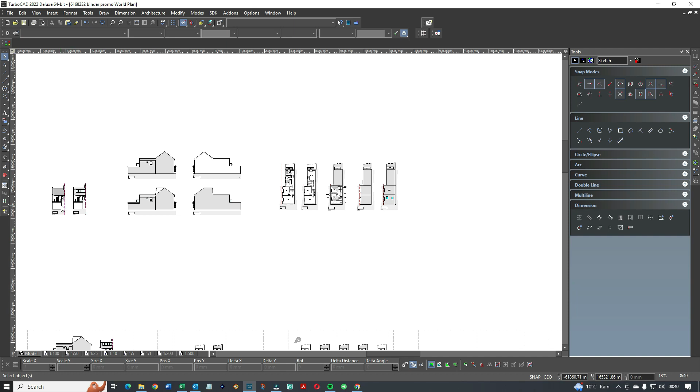I'm Tom Norris, and today we're going to have a look at one of our projects which has crossed my desk over the past few weeks. This is a two bedroom flat, actually a first floor flat in southeast London, and the client is looking to add a loft conversion, which makes absolute sense because they'll turn what is a two-bedroom flat into a four-bedroom flat. So it's a fantastic way of adding value, because with the price of property in the locality, you'll certainly add more value than you'd pay for the cost of the conversion. So I put some of the job files together here for us to look at.

I think what we'll do is have a little look at the layout first. So this is the existing layout. You come up the stairs here - this is the hall and landing. It's a very traditional Victorian end of terrace. So when these houses were converted into two flats, you end up with a lounge, a bedroom, and the back addition is open to debate. Sometimes it's another bedroom, sometimes a bathroom, tiny kitchen, or it could be a kitchen diner. Generally the back addition varies quite a bit, but this was most certainly a lounge and a bedroom when they were converted, say back in the late 80s, early 90s.

So we're looking at this particular flat, and this is the layout as it is. It's being used as a two-bed flat with a little tiny kitchen. It's got a roof terrace, which is useful, but the kitchen is dreadful - stand-up only, absolute bare essentials. The bathroom is quite tiny, and this bedroom is quite tiny. As you can see, there's no wardrobes - you might get a little table there, but it really is pretty poor.

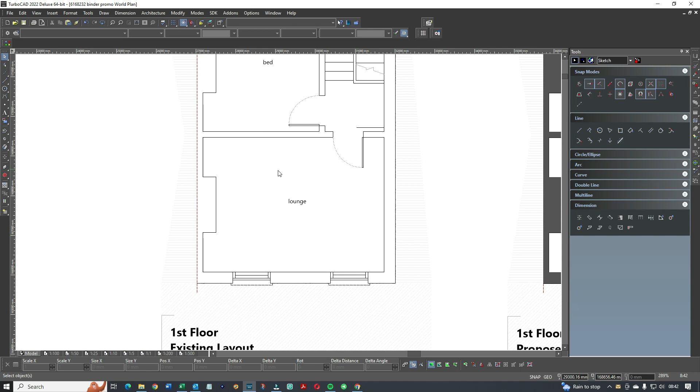Now, I noticed that on some of these conversions, what some developers will do is take this lounge, move the door a bit, run a kitchen down here with kitchen units, and turn it into a lounge diner. Then they'll have a bedroom, another bedroom, and a bathroom at the back. So they'll effectively turn it into a two-bedroom flat again, but with a much better layout. Depends what you want, but generally some of them are doing it.

So this is what we proposed, having consulted with the client, who wasn't looking to get rid of her lounge - she wanted to keep it as it was. So the front room, the first floor front room, is the lounge, then we have the bedroom. These two rooms basically stay the same, but on the back layout we've rejigged it. We got rid of this little small room - you can call it a box room or study - and put the bathroom back where it would have been more traditional, right on the corner. Bare essentials: bath, shower above, little window above the loo, and a standard sink. It actually works fine - it's in millions of homes. That's the style, that's the layout.

So now what we've done - over here in the old one, you can see you've got this big long corridor. Now you've got a really short corridor because the door here enters into the kitchen diner onto the terrace. So this is way better. You could end up putting a breakfast bar here, or even a little small island if you want, or a little dining table - depends what you want to do. This terrace is fine, but I would want to open it up a bit more.

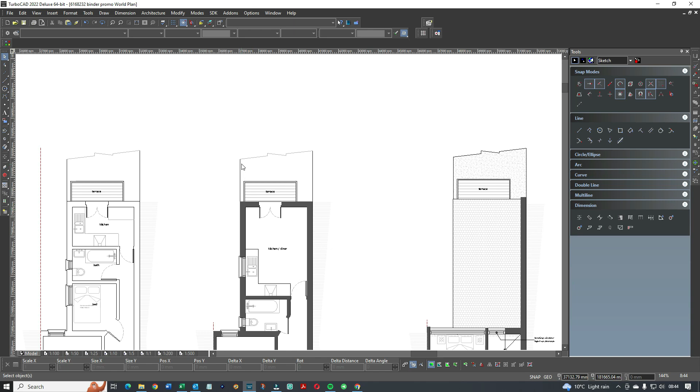The client didn't want to spend the money, but I would have certainly opened it up a bit more to get in more light and make it all more usable. In fact, you could even consider pushing this out a little, extending it out on top of the ground floor. But again, it's all to do with cost.

The main project here was to get a loft conversion done to the flat. So the usual scheme on these houses is that where the stairs come up, the stairs to the loft actually go around again, following the same line as the original staircase. So this is what we end up with in the loft - go up that stairs and you end up coming up here.

In the corner, we opted for a mansard conversion rather than a dormer, because this is an end of terrace property, so we can build up this wall no problem, and that will allow us to get the stairs in much better.

And you've got this landing area, you've got a window, loads of light pouring into the staircase, open stairwell, and loads of storage again on this landing.

And then you have one bedroom, bedroom 2. This one will be serviced with a Velux window, bathroom serviced with a Velux window, and this particular one has full width windows, and it could even be floor to ceiling if you wanted to get loads of light in. It's up to you, and as you can see there's quite a bit of space used for storage, as in wardrobes. These are standard wardrobe sizes, same here.

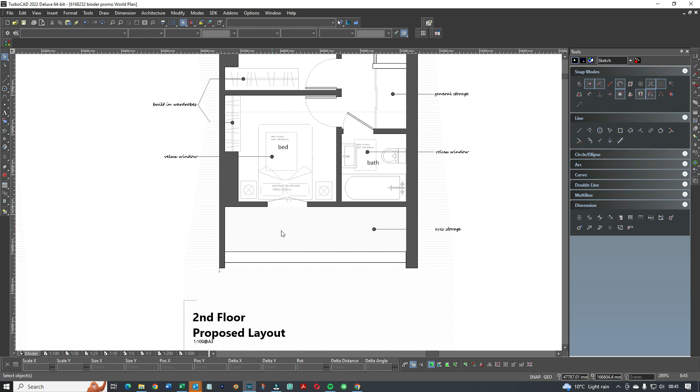We've kept the chimneys in to reduce costs, and of course the front loft area is the eaves. We've given a bit of access, and that's to be insulated and boarded over, etc.

So in other words, it's gorgeous, adding a lovely 2 extra bedrooms and a bathroom to the flat is really going to up the value.

If you consider that an extra bedroom is likely to add 75 or 80,000 pounds to the value of the property, 2 extra bedrooms will add 160. So 2 bedrooms will add fantastic value, way more than what the cost of the loft conversion would be.

We anticipate that the loft conversion on this flat would be about 45,000 pounds. Added value would be in the region of 150. So there you go - if you want to make 100k, then this is what you need to be looking at.

Buying the first floor flat, and then getting a license to alter from the freeholder to be able to use the space. And just so you're aware, on all of these houses that have been converted to flats, the landlord owns the space below the ground floor and above the top floor.

So you can't just do a loft conversion - that's his space, or hers space. So you'd have to get a license to alter and permission to be able to do a loft conversion. Can't just do it willy-nilly.

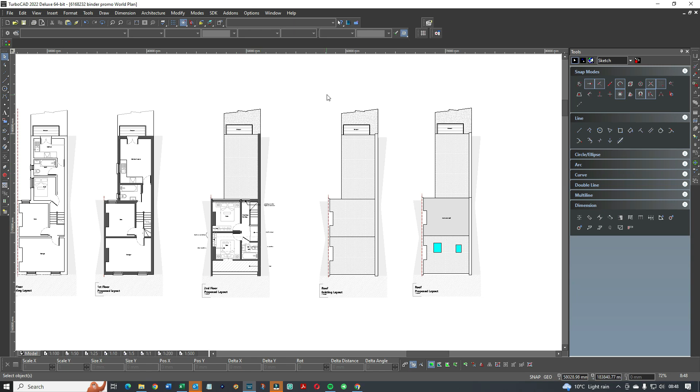The roof plan looks very similar, with the exception that we've got a flat mansard roof here, and as I say, the mansard walls, the boundary wall here at the end elevation side wall is built up, and likewise here.

So you would need a party wall agreement that will allow you to build on top of the party wall to get your mansard. If that fails, then you'll have to do one side mansard, and this side would be dormer, if the neighbours won't agree to give you permission to build on top of the boundary wall.

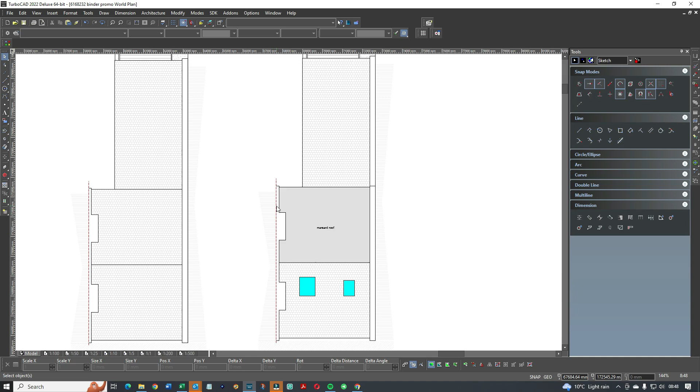But front elevation, a couple of Velux windows, which you'll need for this front bedroom and the bathroom. That's about it. You can see on the side elevations, the change is very little.

This is the existing side elevation. All that's going to happen is this little bit will get added on, and that's all you're going to see.

And likewise on the west side, the other side elevation, you're going to see this bit of brickwork added on. So it's very discreet, to be honest.

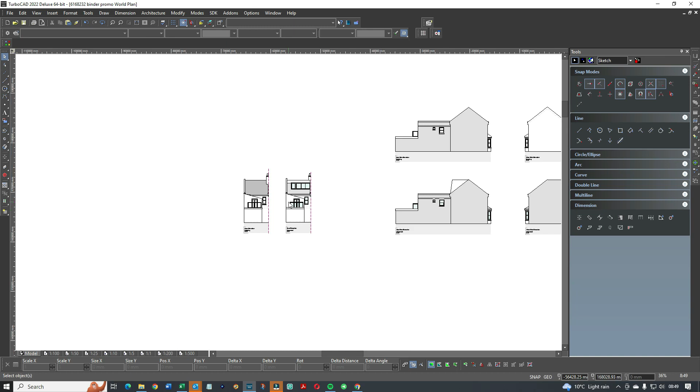Looking at it from the rear elevation is where it has the biggest impact on the elevations. This is the existing view. This is already the back addition here, and they built the ground floor out on here.

They built an extension. So my client, a few years back, built a small terrace. It's just an aluminium and glass affair, to give them an extra 2 or 3 meters from the little kitchen.

Like I say, I would probably have done substantially more, as in opening up and increasing the size maybe of the extension here. But the neighbours, well, let's just say, I don't think the budget was there for that.

So this is what it looks like now. As you can see, we've got the mansard on this side. Hopefully we're getting the mansard here, building up the walls, and then again, this is the window for the stairwell.

Personally, I like to drop this down the whole way, even if they're not going to be having, say, the more traditional French doors and Juliet balcony. I still like to drop this down completely and get tons of light, and that way if you didn't want to use it as a bedroom, maybe you could use it as an office, a home study, or a teenager's bedroom. There's lots of other options as against just having the windows across.

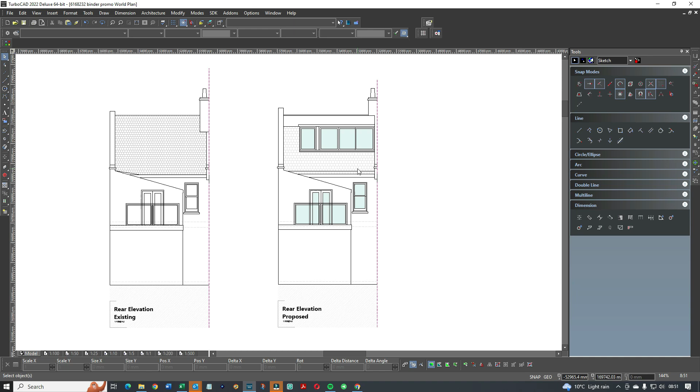But again, with an older client, that's what they've gone for, the windows rather than the full height. That's about it. So it was an interesting little project.

Just think about it. In summary, it's a one-bedroom flat. It's a Victorian property that was converted about 35 years ago, and the client was aware that if she got a loft conversion on it, she would be

able to add quite a bit of value and possibly make some money, in the sense that she'll probably have this work done. We've actually done the planning application for it, and I see no reason why it won't go through. Once she gets planning and has the work done, the chances are she'll sell when the market is right.

And she's effectively made 100k, as against selling it as it was. She's likely to get 100k out of it. So yeah, it's one shrewd lady, and I'm really pleased. Lovely little project. All right, that's about it.

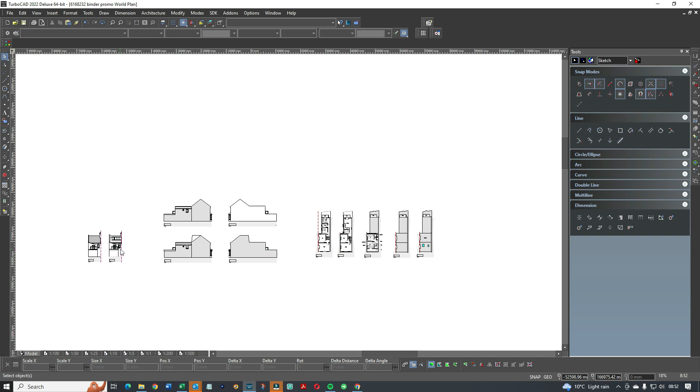Most of the projects we do, the intention is to create little videos from them, because we're not just teaching you how to draw plans, we're teaching you about, I suppose, the business of buying and selling property, and what kind of extensions add value and so on.

So like I say, if you buy a house just to make some money, that's all well and good, but if you don't have the budget, then I'm just suggesting this project suggests you just buy the first floor flat and get a license to alter for the loft here, and you're likely to make

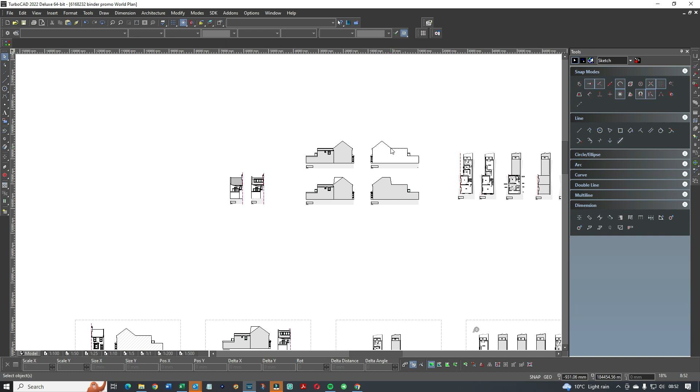some serious money. But don't forget, the actual amount of money you make is determined by the postcode, so buy in the right area. And my advice always is to talk to local estate agents to see how much an extra bedroom will add to the value of a property.

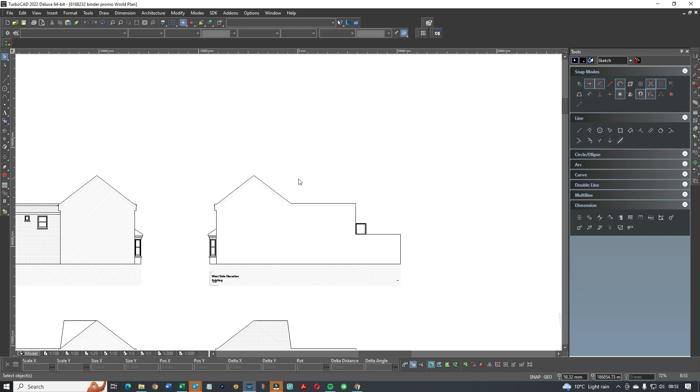And if they tell you it's more than 50 or 60,000 pounds, and the loft conversion is 30 or 35 or 40, again depending on where you are, then you're making money. But just that little bit of due diligence should always be applied.